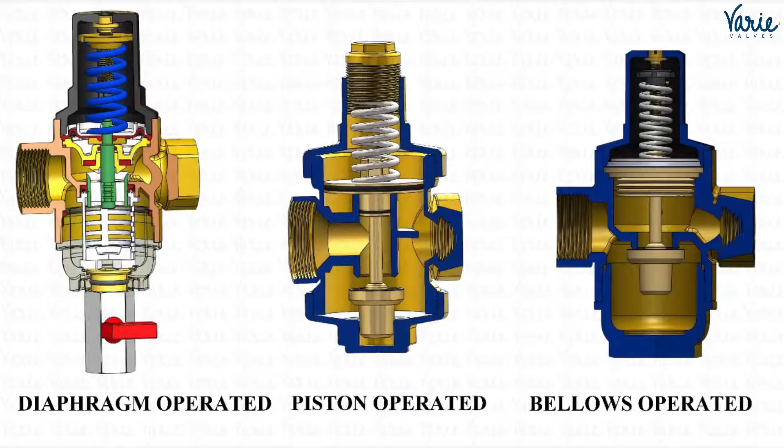In a diaphragm-operated PRV, the diaphragm is the pressure-sensing element which expands and contracts, and with that the valve's opening is controlled, which in turn helps reduce the pressure.

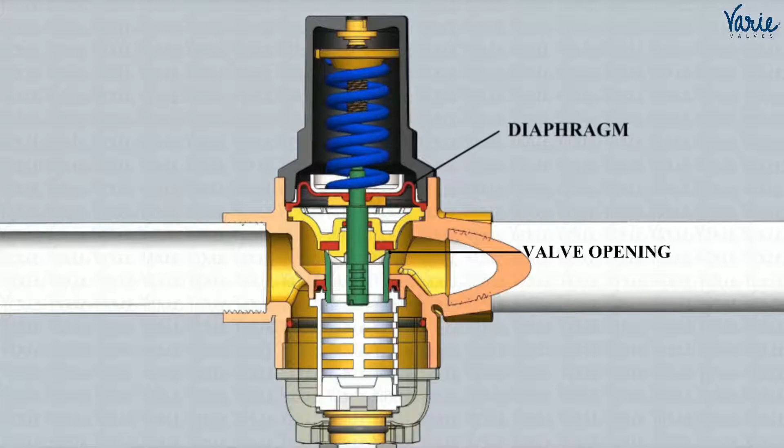In a piston-operated PRV, the piston is the pressure-sensing element which reciprocates in the chamber and controls the valve's opening and thereby the outlet pressure.

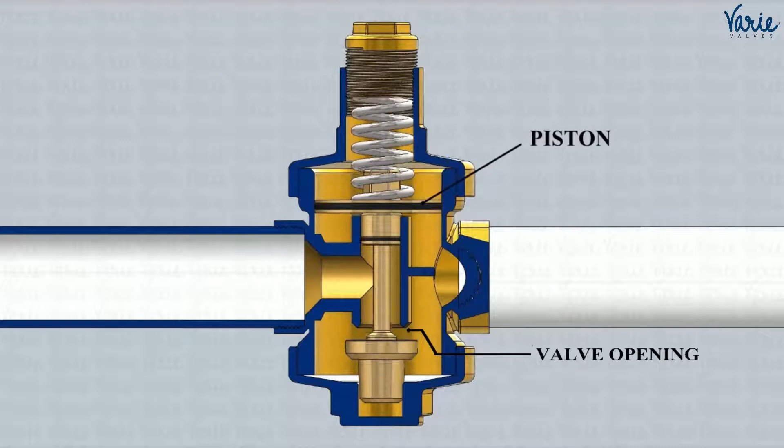In a bellows-operated PRV, the bellow is the pressure-sensing element which expands and contracts and controls the valve's opening and thereby the pressure. To understand the difference between these PRVs, let us understand how a piston-operated design in PRV came into existence in the first place.

When the need for a PRV in oil applications came, an important design criteria was to ensure that the pressure-sensing element should never rupture with wear and tear, because spillage of oil has far greater implications than with water or any other medium, as it is costly and has a fire hazard associated with it.

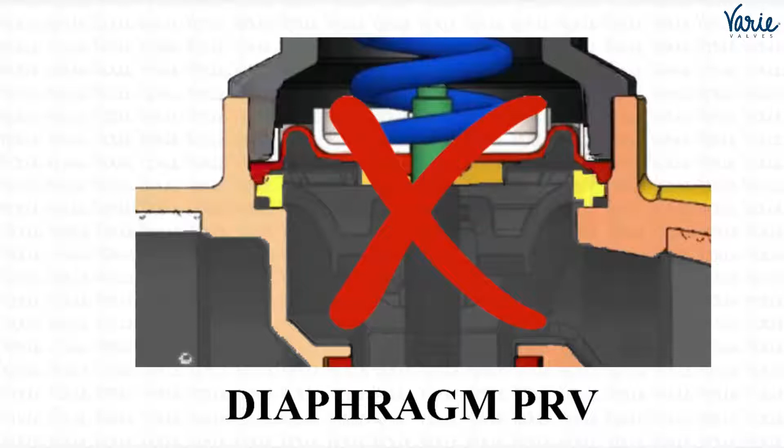Here, the diaphragm system would not be suitable because of chances of rupture after long period of use. Hence, the piston design, similar to the engine piston, was adopted.

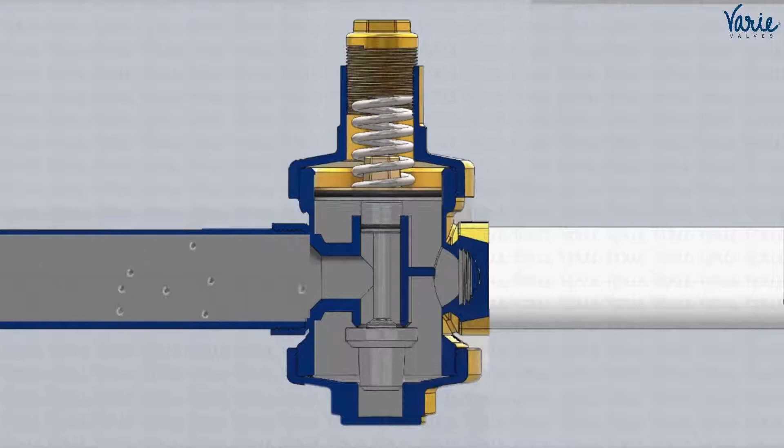The piston, being made of a solid metal disc, has no chance of rupture or failure except for small leaks across its rubber O-ring, and because oil is self-lubricating, the problem of friction would not be there. However, owing to its low capital cost of manufacturing, these piston-operated PRVs found its way for water applications as well.

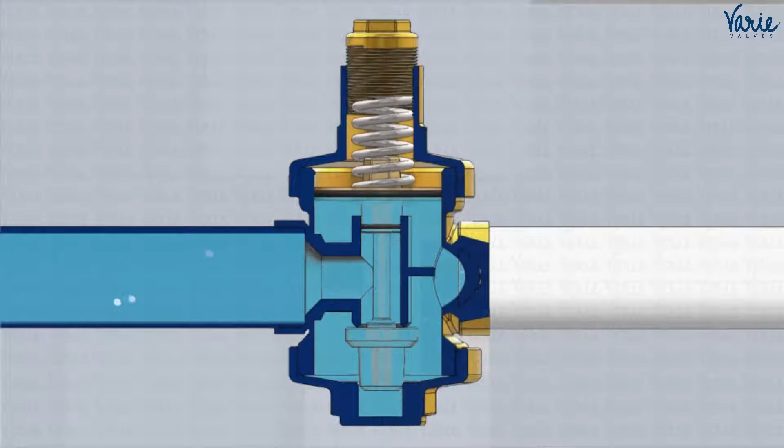Let us understand these drawbacks. Once installed in a water application, within only some months the piston's movement becomes extremely sluggish due to the lack of lubrication, thus impairing smooth pressure control.

And this problem is further compounded with the TDS or hardness present in water, which causes scale deposits around the piston. Eventually, the piston seizes. This is quite like the seizing of a piston in an engine cylinder in absence of a proper lubricant.

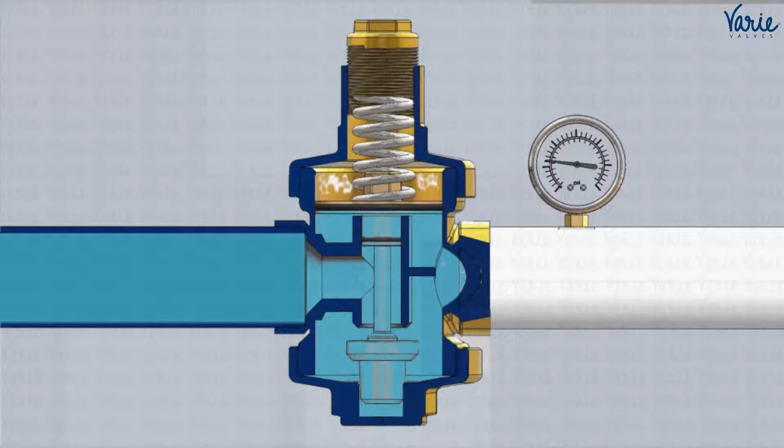And whenever the flow or demand of water stops, the pressure rises and equalizes with the inlet pressure and causes damage to the connector pipes and other gadgets.

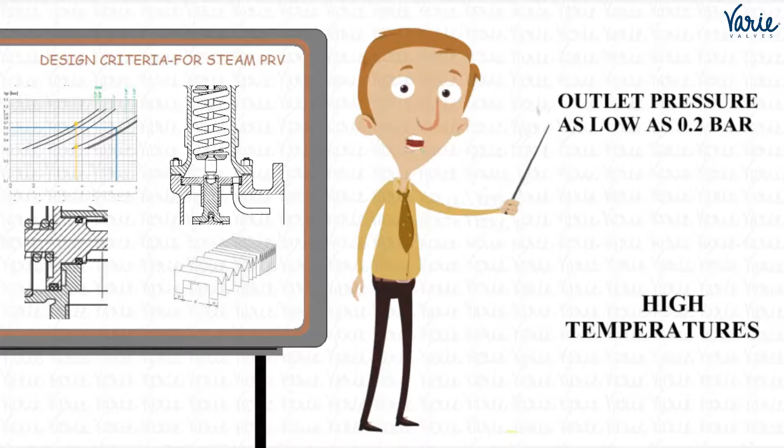Similarly, let us see what happened when a PRV was needed for steam application, where the main concerns were high temperatures and outlet pressures as low as 0.2 bar. Engineers came up with the metal bellows design, which has expansion-contraction movement and a much larger surface area to handle such low outlet pressures.

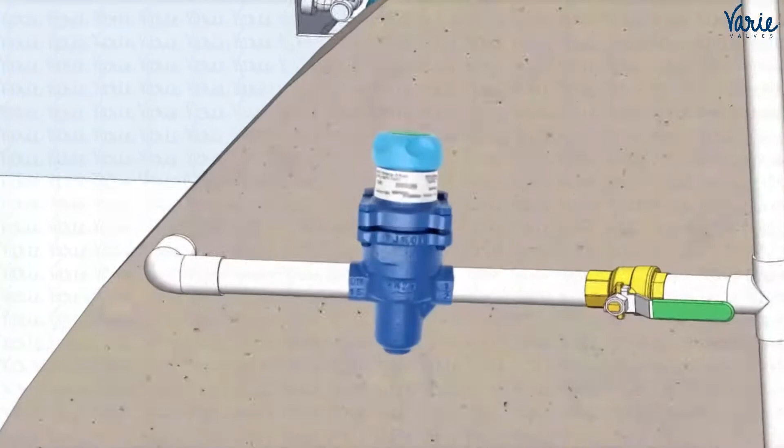These bellows-operated PRVs also found their way into water applications in buildings. But owing to their high price, they are not so commonly used except where low outlet pressures below 0.5 bar are required.

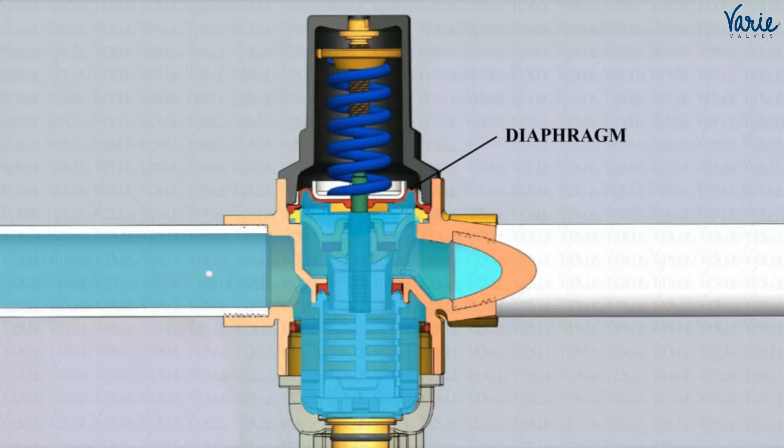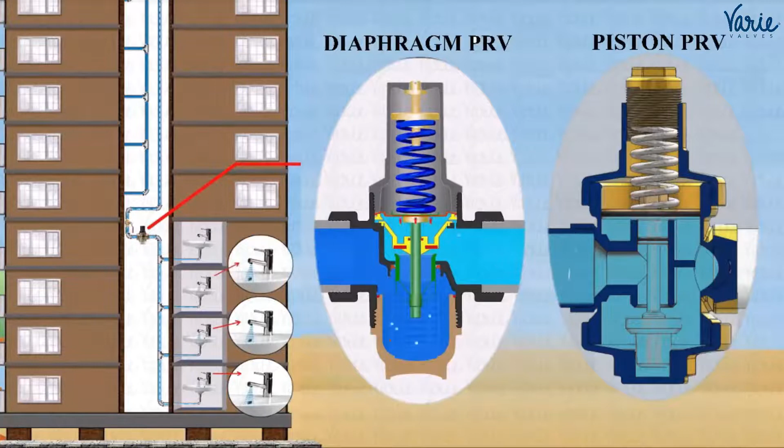Now coming to the diaphragm-operated PRV. With the expansion-contraction principle of the diaphragm, there is no reciprocatory action and therefore no friction or need for lubrication. Moreover, with modern-day thin-section diaphragms, the PRV responds to even small changes in flow or pressure.

Whereas a piston-operated PRV may hardly register any change in its control mechanism for such small changes in flow.

Also, with the use of quarter-turn fittings or flush valves, the demand for water, or more correctly the flow rate, changes rapidly in less than a second.

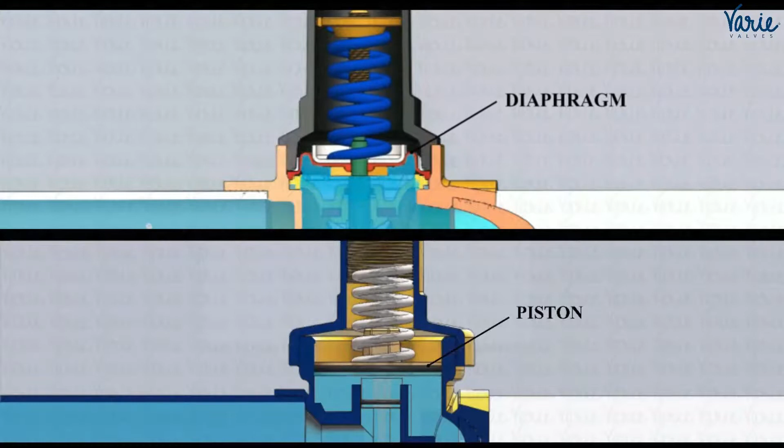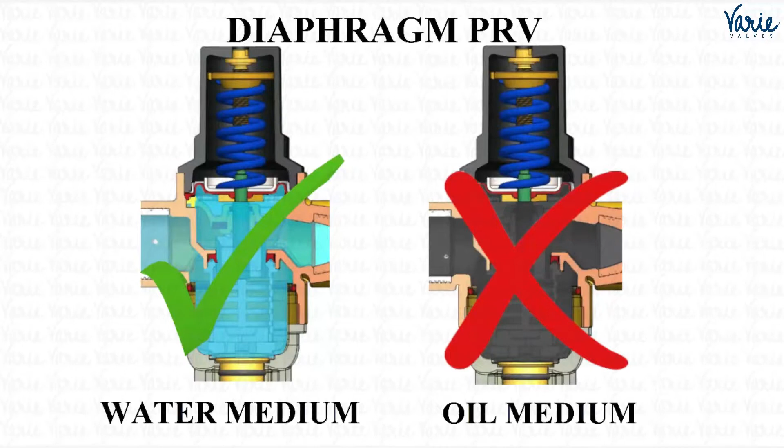In such cases, a diaphragm or bellow will respond very quickly to such sudden change in demand, unlike a piston which has very slow movements. So, just as a diaphragm PRV is not ideal in oil application, a piston-operated PRV is not ideal for water.